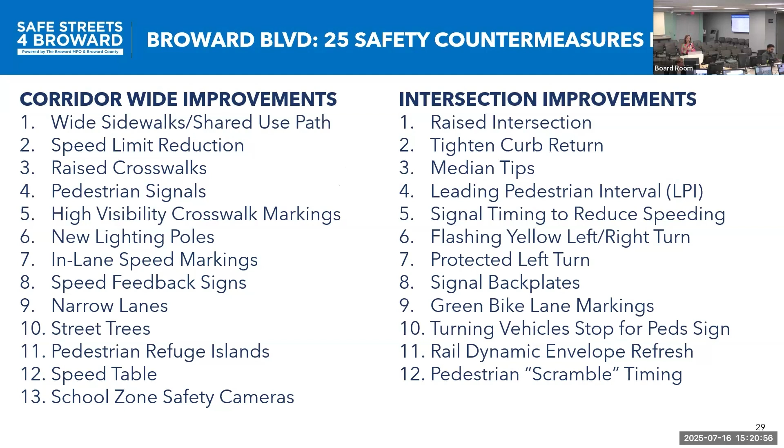As we talked about, a lot of these we're trying to use the safe system approach, so redundancy is key. At intersections we have a lot of overlap, right? So flashing left turns, raised intersections, kind of putting all those things on top of each other in hopes of getting to zero fatalities.

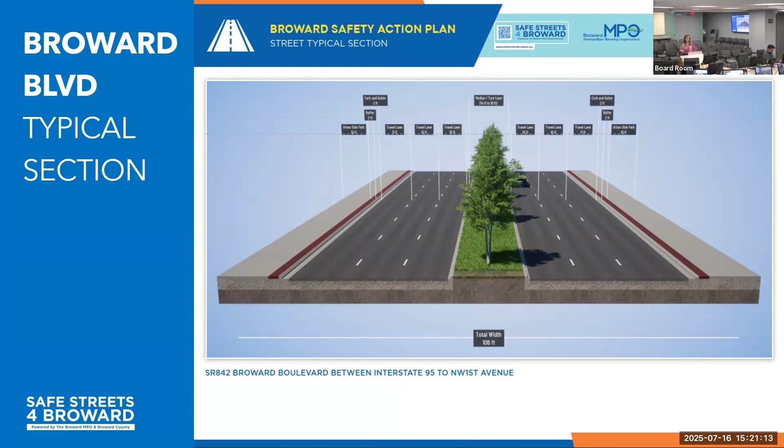This is our typical section that we proposed. No lane reduction because we have like 70,000 cars on our boulevard in the morning. It's crazy. But we widen the sidewalks, kind of reassess the bike lane space into wider sidewalk space to create safer streets.

And then the corridor, which is kind of small, I'm sorry, but for each of them we did a concept that's engineered over an aerial with the right-of-way lines. You can see all the improvements along the corridor where we aligned bus stops with crosswalks.

This is a good one where we had existing bus stops, but we added some mid-block crossings that are signalized, a lot of raised elements to get people to go the target speed of 30, 35 miles an hour. Obviously you're in downtown - this is a reminder this corridor is on the state's list of top deadliest bike and ped corridors, unfortunately. So really getting those speeds down as you enter downtown is key.

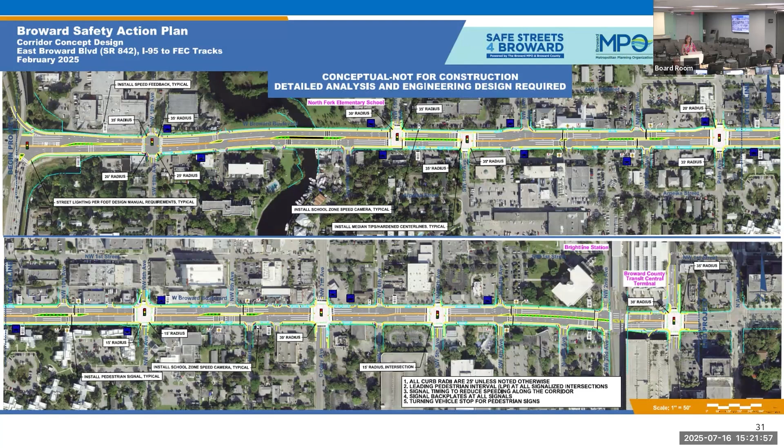Stirling Road is another FDOT corridor. Our corridor was 95 to US 1. On this one, we had 27 safety countermeasures proposed, 16 corridor, 11 intersection improvements.

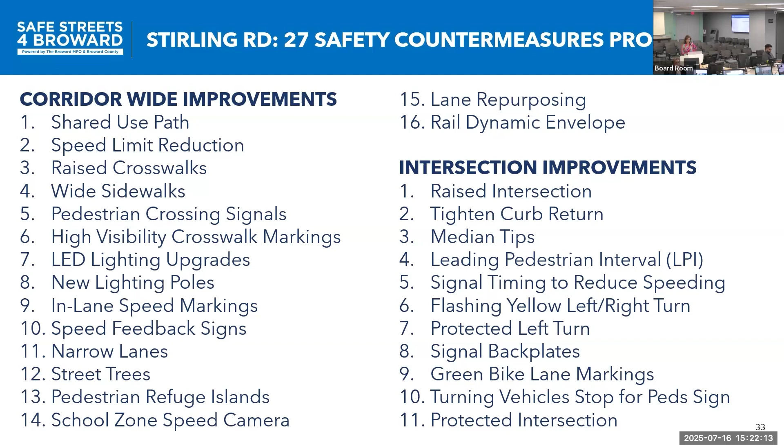I'm just going to quickly go through these. This one had 2 segments. From I-95 through the Dania Point development to Bryan Road, you can see the top intersection. We kept the lanes because we've got those big developments on both sides, north and south. Then as you go east, we were able to repurpose the lane going east to US 1.

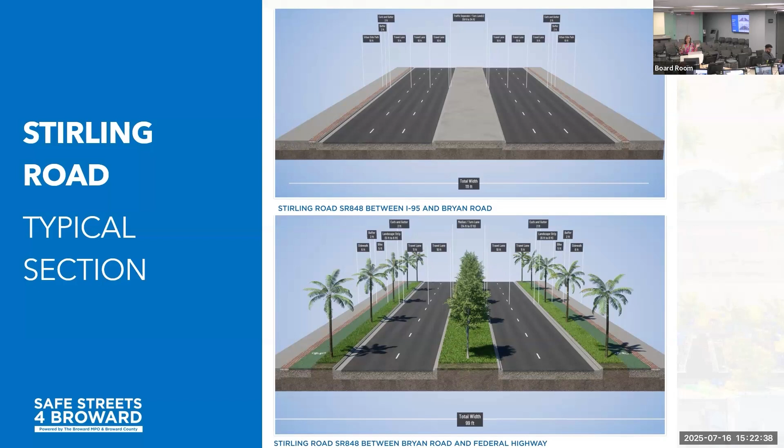You've got a residential area and be able to get those protected bike lanes, wide sidewalks with the tree lining. So that's the intent of Stirling.

Here's the layout. You can see the interstate on the top left, then Dania Point, and that Oakwood Plaza is on the north and south as you get to Bryan Road, which is that first intersection that's coral color. It's a raised intersection to kind of enter into the more residential local context.

And then through there, you've got the 4 lanes, medians, offset sidewalks, tree-lined streets, raised intersections, raised crosswalks to connect transit. We've got kind of a wonky intersection at the railroad that we were able to tighten up.

People are having issues stacking up on the train tracks and not being able to see the signals, so really tightening up that intersection there. And then, yeah, just really tightening everything up and being able to create a safer street.

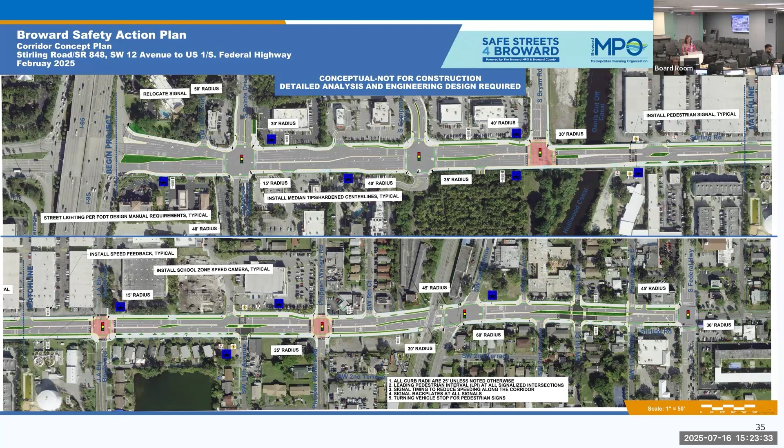The third FDOT corridor is US 441 from Davie Boulevard north to Sunrise Boulevard. This is Fort Lauderdale on the east, Plantation on the west, and Lauderhill on the north. So we've got 3 cities. On this one, we've got 22 total safety countermeasures proposed, including 12 corridor wide and another 10 intersection.

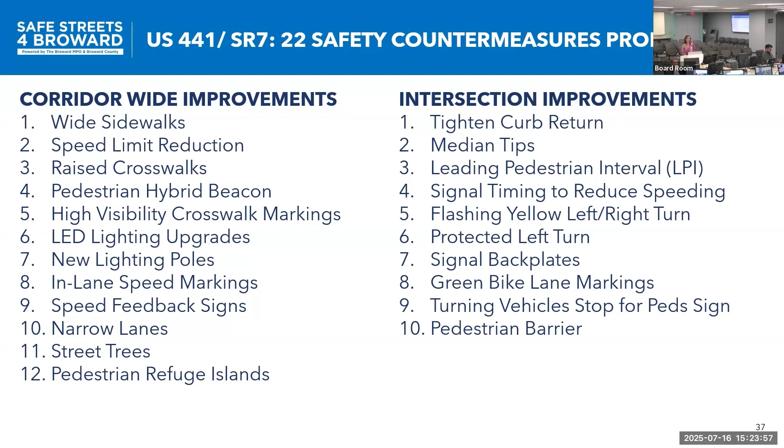Within this one, we have two cross sections, very similar. We're keeping all six lanes. This corridor has a plan to have PREMO transit on it, so we were aware of that. Hopefully there will be a bus priority lane at some point.

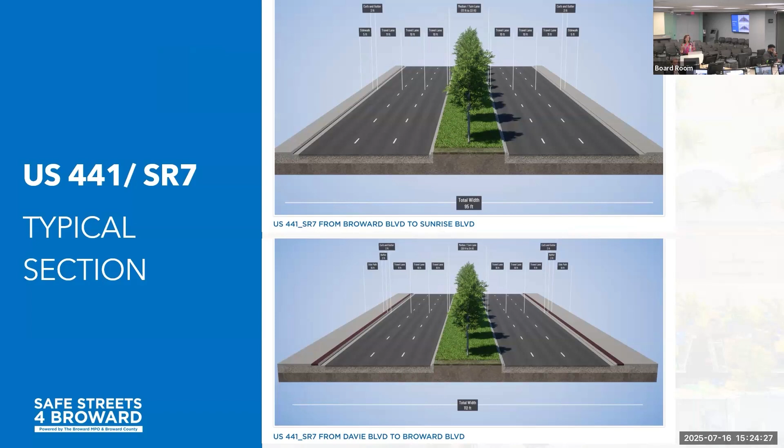But widen the sidewalks. The one on the bottom is to take the existing bike lanes and make them into wider sidewalks, so we're able to reprogram that space and then obviously keep the medians and narrow the lanes.

This one's a little longer, so I've got two pages, but the top left is Davie Boulevard, and then you move north to the right. Really trying to add medians where we could to improve safety, add mid-block crossings, raise those crossings, align them with bus transit to try to get the speeds tempered by narrowing everything up and widening those sidewalks. Unfortunately, not enough space to put in a landscape buffer between our sidewalks and cars, but just trying to squeeze everything down and get the speeds way down was the main goal here.

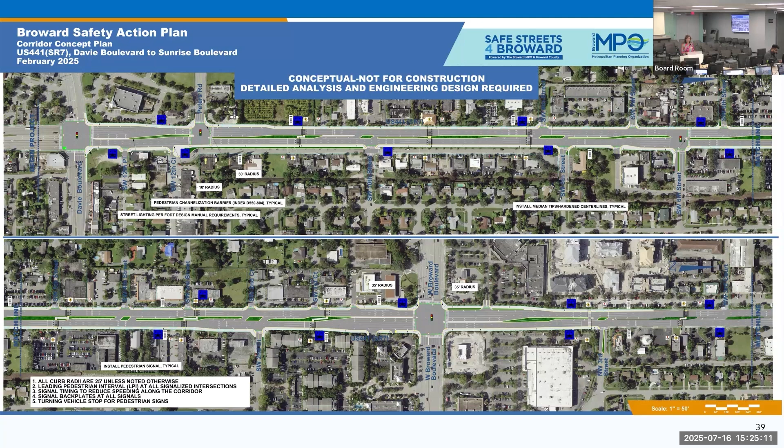And it goes all the way up to Sunrise Boulevard. You'll see on the right side of this screen, there's a trail that runs along the south side of Sunrise Boulevard, and so we've included the trail crossing as a proposal there to get people across safely.

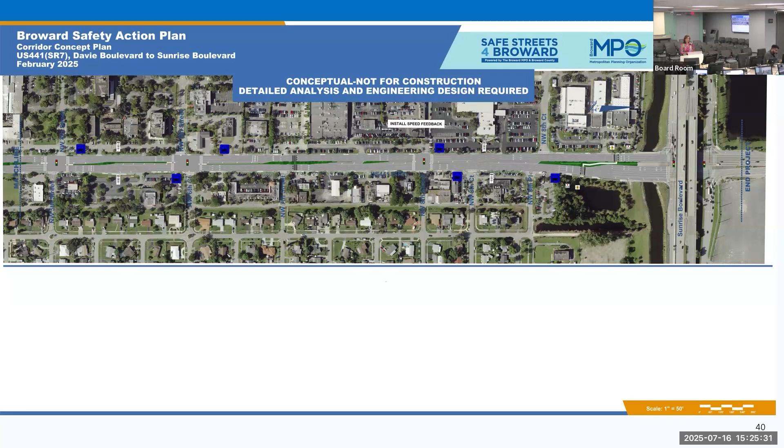So then we move into our county corridors. 31st Avenue is our longest corridor, about 5.2 miles from Northwest 8th Place, just south of Sunrise Boulevard, to McNabb Road. This touches five cities: Fort Lauderdale, Lauderdale Lakes, Tamarac, Lauderhill, and Oakland Park. So five cities.

This one got packaged up by Broward County to propose for a Safe Streets for All implementation grant. Very excited about this one moving forward. This is unfortunately the riskiest street to travel on in Broward County currently, but hopefully not for long. We have 26 safety countermeasures proposed, 15 corridor wide, and then another 11 at intersections, trying to get that redundancy at all those locations.

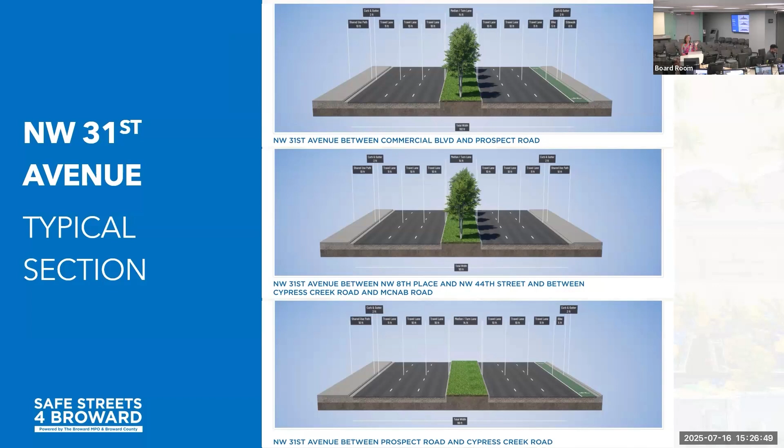Our typical sections, we had several because the right-of-way changed and then the opportunities changed, but basically trying to get really wide sidewalks, especially a consistent wide shared use path on the west side of the street as you move north. In some areas, as you can see, we have dedicated bike lanes, so we kept those where they were.

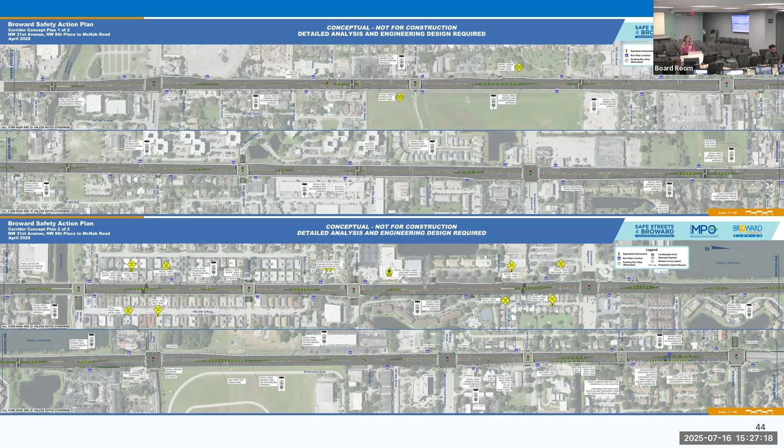And then this one's really long, so I apologize, it's super small because it's 5 miles, and I didn't want to bore you with 20 sheets. Overall, you can see we've laid out all the lanes, mid-block crossings, raised intersections, narrowed the lanes, added trees, and all the technology. We have a school zone on this one, so proposing adding all the school zone amenities, proposing cameras, the new safety cameras as well.

19th Street is next. 19th Street is also a county corridor. I think my limits are completely wrong, I'm sorry. So the limits on this one are 43rd Terrace all the way to 31st Avenue.

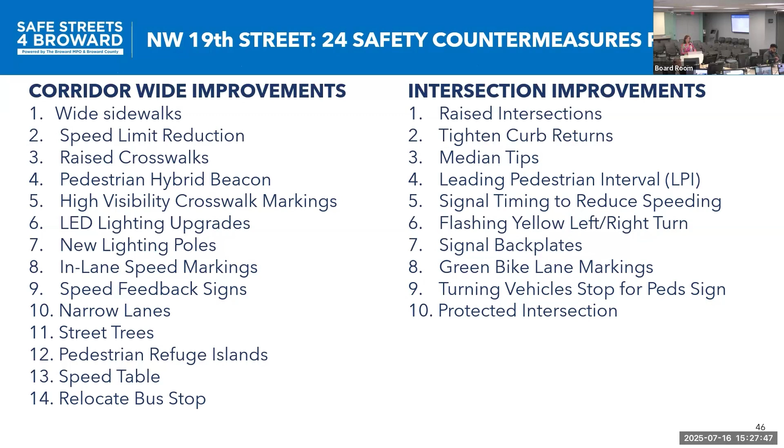The corridor-wide improvements, there's 14, and then another 10 intersection improvements, for a total of 24. So trying to get improved speeds is basically a big one here. We do have some trucks with some industrial here, so making sure that we're accommodating those turns.

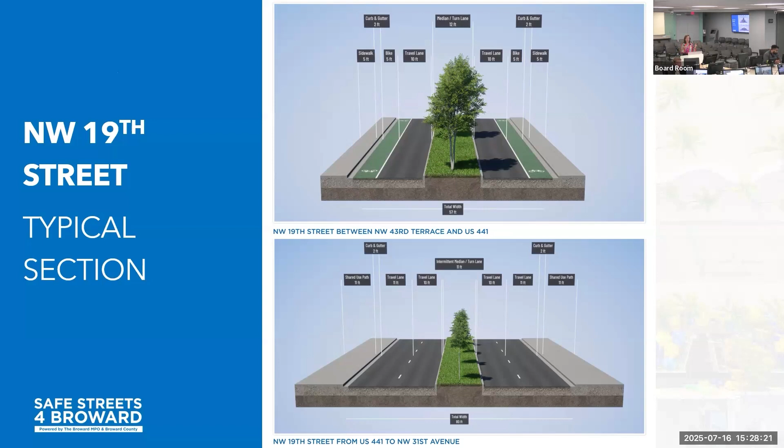But on the 43rd to 441 section, there's actually an MPO county project that's being constructed right now, so that'll be the cross section you see on the top. And then from 441 east to 31st Avenue, basically we're going to take the shoulders, narrow bike lanes there now, so kind of take that space back and do really wide sidewalks on either side and then narrow everything up.

Add trees. So here you can see on the top, the center is your 441 intersection, so we'll take it from there to the east to 31st Avenue, add medians, add trees, raised intersections, raised crosswalks. We've got some speed tables as well. You can see the industrial along the north, so making sure that trucks can make that turning movement. We made sure we didn't block off anything with those medians, but trying to balance everything.

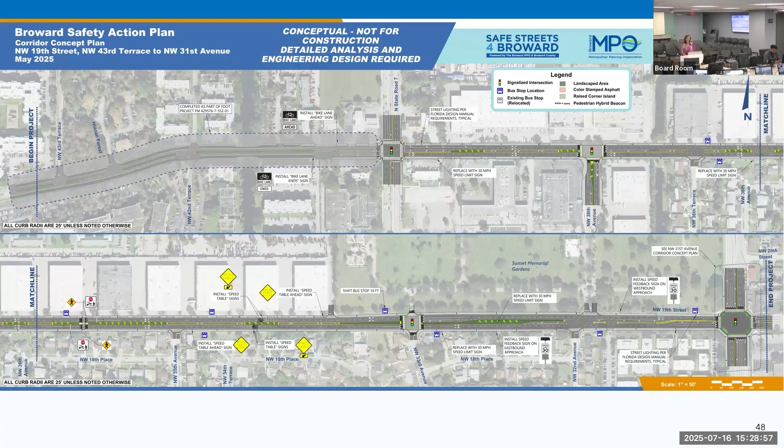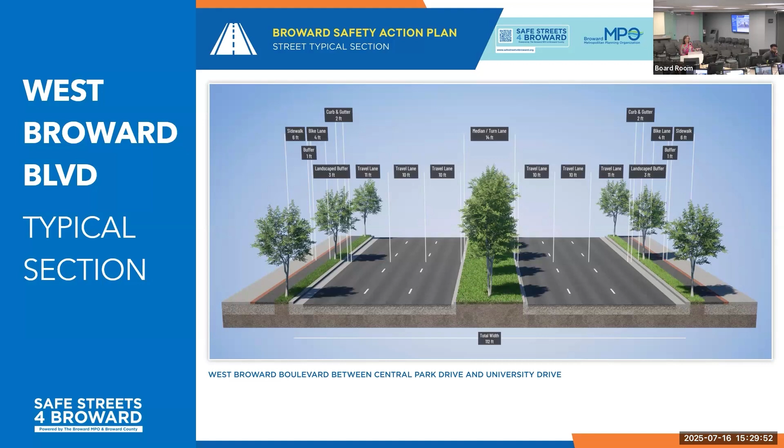This corridor is where the city and county offices are, if you guys have been to Broward County. The cross section keeps the lanes but basically narrows them up. So you've got 10-foot inside, 11-foot outside for transit. By squeezing everything together, we can create that separated space for bikes and peds. So we've got a really narrow landscape buffer, I think it says 3 feet. And then you can see the bike lane and sidewalk are there, trying to fit as many trees as possible to get that enclosure feel.

This project, top left is Central Park Drive. You can see Central Park is on the north side there. Then as you go east, Pine Island, and then the mall, Broward Mall, is on the south as you go east on the bottom to University Drive. Again, medians, trees, aligning bus stops with raised crosswalks, a couple of raised intersections to really get those speeds down, speed radar signs, and then of course all the technology at the intersections.

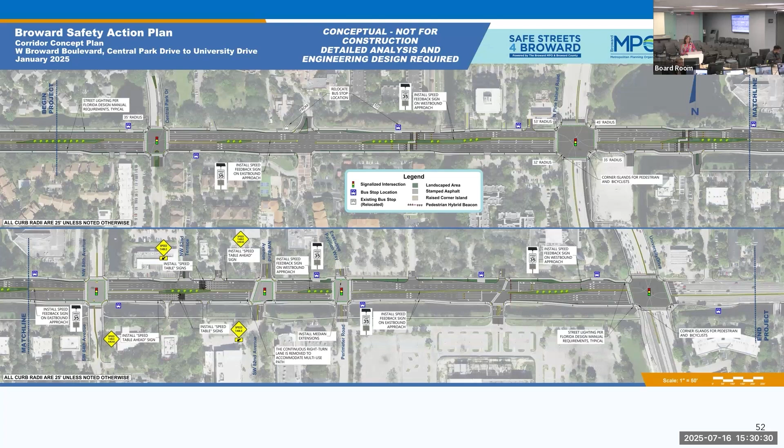So starting with city corridors, Royal Palm Boulevard is in the city of Margate. This project is Riverside to 441. We have 22 safety countermeasures proposed on this corridor, 13 corridor, another 9 intersection.

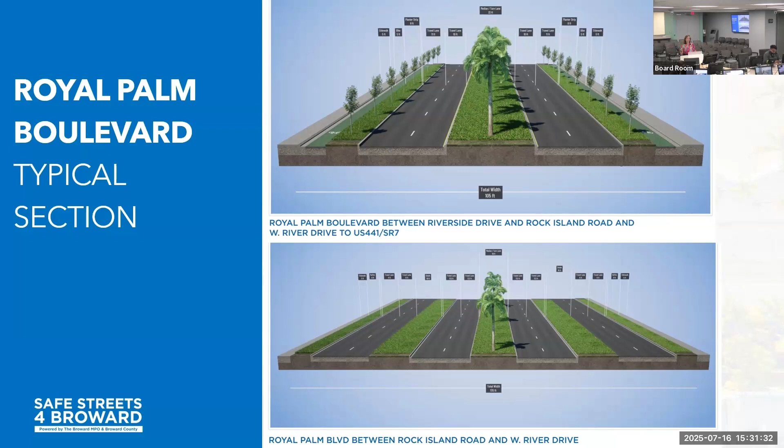This one is 4 lanes existing, but really, really wide lanes and a very wide median. So we're able to reallocate the space from the median to create 2 landscape buffers on the sides, is how we did it. So no new right of way, just taking that space and reallocating it. You can see we got protected bike lanes and sidewalks on both sides on the corridor from Riverside to Rock Island. Then when you get to Rock Island going east, there's these frontage roads that exist. So our thought was we'll use the frontage roads that are very low volume as our parallel bike facilities and keep the bikes and peds separated, then just narrow up the street to do some traffic calming.

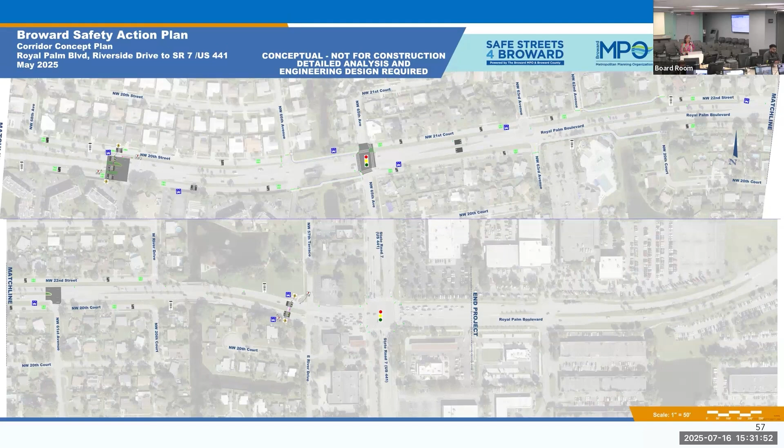And these are the concepts. So you can see a lot of green is kind of shifting to either side. Right now there's a really wide median. And then here we just did spot improvements, so we just showed the aerial with the spot improvements. You can see some intersections and some raised crosswalks, some median tips.

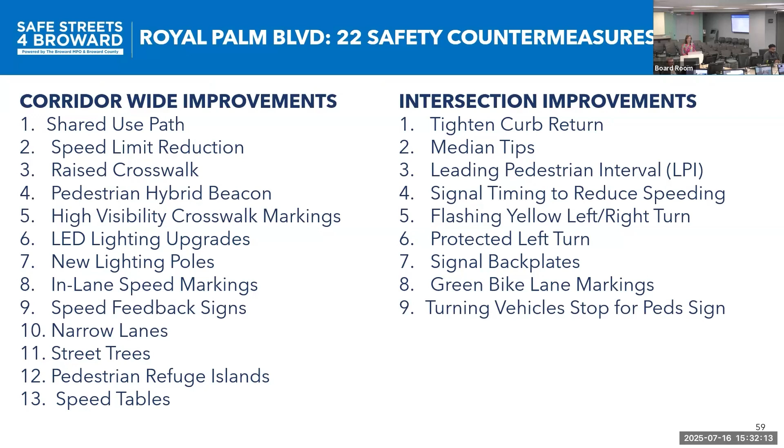Rock Island is another corridor in the city of Margate. Our limits are Southgate Boulevard to Royal Palm. This one has 22 safety countermeasures, similar to Royal Palm. It's a similar suburban context, so 13 corridor, 9 intersection.

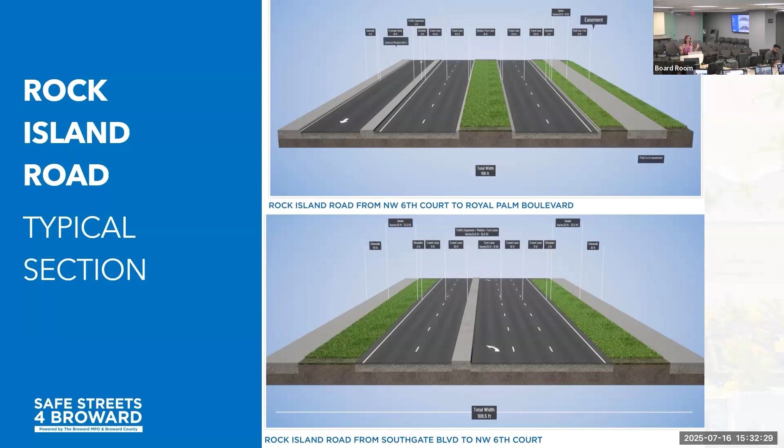This one also has that frontage road, as you can see on the top, so you've got kind of this frontage road feel, putting the bikes there. Then as you move south, the frontage road drops, and so really creating those wide separated spaces for the pedestrians and then narrowing up all the lanes. Speed is really a big deal on Rock Island and Royal Palm. You would think because it's in the suburbs that there would be less people crashing, but there's a lot of crashes here, and the speeding is evident when you're out there.

This one starts at Southgate Boulevard, which is kind of not a square intersection, as you can tell. So making sure the turning movements work for the vehicle types, we tightened up that northbound right turn was kind of a high-speed right, so we put some curvature in it to try to slow that down. Then you can see just north of Southgate Boulevard, there's a canal crossing, so we proposed adding a trail crossing there with a raised crosswalk and a signal.

And then as you move north from there, it's really narrowing up the lanes and then creating really wide shared use paths on both sides. As you move north, north of 6th Court on the bottom there's this really big swath of green, and we understand that's an FPL easement, and the city has an agreement. So we're able to widen our trail onto that easement, which was really useful.

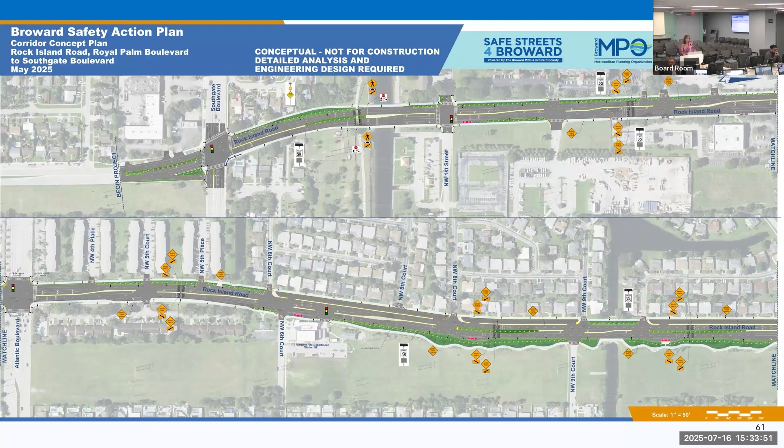And then this goes all the way up to Royal Palm Boulevard. So it intersects actually with the other project that we did.

The next corridor is Sistrunk Boulevard in the city of Fort Lauderdale and partially in Broward County, from 27th Avenue to Andrews Avenue. Sistrunk Boulevard, unfortunately, is the riskiest city street in Broward County.

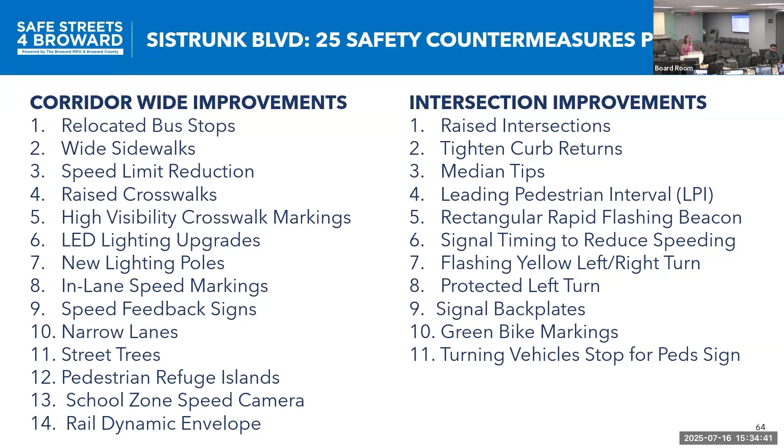So a lot to do here. We proposed 25 safety countermeasures, 14 corridor, 11 intersection. The city and the county have done a lot of work on Sistrunk over the years, so some of these improvements you'll see listed are already there. Wide sidewalks is one of them. They're already there, but I wanted to make sure we were giving you a holistic list. I'm not trying to take credit, so good job to the city and the county already for doing a lot here. But it's still really risky, so what else can we do?

This one's really narrow already. On the west end, which is the county jurisdiction from 27th to about 22nd, it's 4 lanes right now. We kept it 4 lanes, but tried to squeak the lanes a little tighter so we could widen the sidewalks and try to separate those sidewalks. Then in the city section, 22nd over to Andrews, you've got 3 lanes for most of it. So really trying to squeeze it again, but it's really tight already. We noticed when we went out there, there's 9 and 10-foot lanes already.

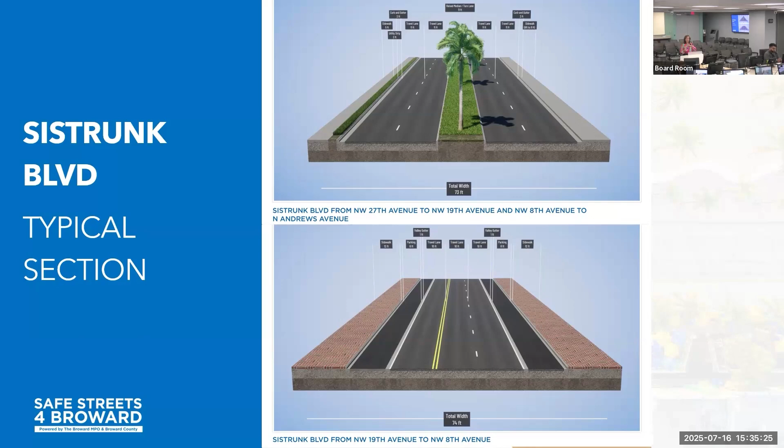So really the improvements that are key on this one are going to be lighting. It's a huge issue out there, really dark at night. They have decorative lighting, and some of the lights have already been retrofitted to have a brighter fixture, but most of them haven't been. So I think that's hopefully an easy intermediate fix for us.

Also adding some more traffic calming, because hopefully if there is a crash in the future, if speeds are lower, hopefully it won't be fatal, right? So adding raised crosswalks. The city is already proposing 5 new crosswalks on this corridor. I think those are going in maybe as soon as this year. So I'd really love to get this finished, so maybe you can raise them, Karen, wink wink. So we can get some traffic calming and then maybe raise some intersections.

One thing - we had both of our public meetings at the YMCA, which is right in the middle of the corridor. That's really a community center, and you've got a lot of people walking to that center, but there's really no intersection control at that intersection where people are coming from the south to get to the YMCA on the north. So we proposed a kind of tabletop speed table for the length of the face of the YMCA, so it's like a shared street in front of the YMCA, for traffic calming and pedestrian safety there.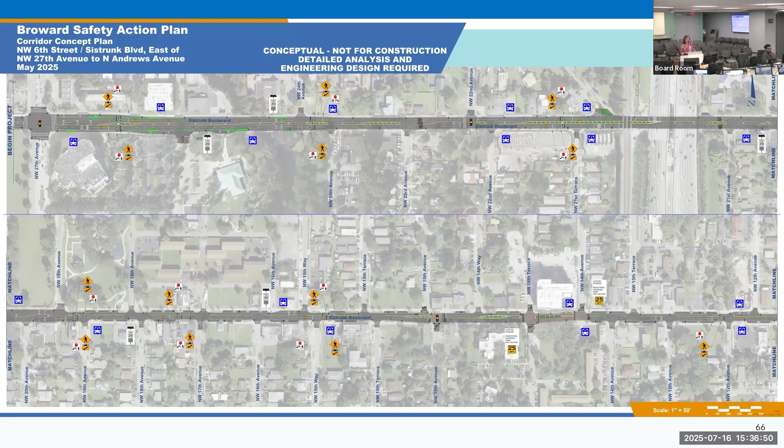So a lot of improvements proposed on this one, but we were scratching our heads because it's already narrow, right? It only has a few lanes right now. So really, how do we add more safety and get creative on this one? Lighting will be key, and safe speeds will be key on this one.

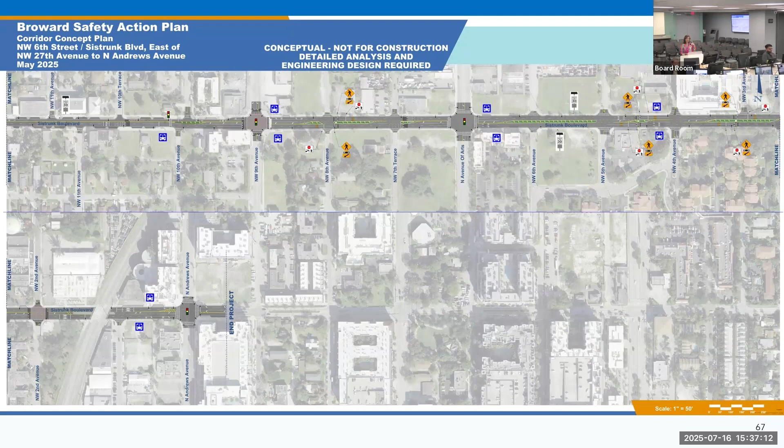Southwest 10th Street is a corridor in Deerfield Beach. This one is a city corridor east of I-95 over to Dixie Highway. We proposed 22 safety countermeasures, 15 corridor, 7 intersection, and on this one we actually proposed roundabouts.

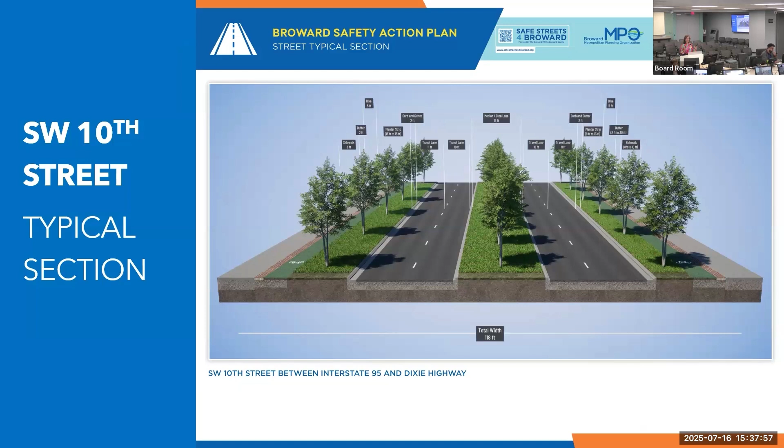So I'm really excited that we got to do something a little bit different on this one. This one also is 6 lanes east of the interstate, but the volumes showed that they would warrant a repurposing to 4. So we gave them an opportunity to reallocate that space to create protected bike and pedestrian opportunities with tree-lined corridors on both sides. And then this is the beautiful roundabouts.

So west of here, I'm sure all of you know, we have the Southwest 10th Interchange Expressway project, and that'll tie in right at where it says begin project. The good news is that the engineer who designed this project is also leading that project, so hopefully we'll get some - what do we say?

Some synchronization between the two, because he's being thoughtful of what to design there.

The intent is they're going to do a 4-lane local street on Southwest 10th west of here, and the expressway functions will be separate, so those 4 lanes will tie right into these 4 lanes. That gives the city an opportunity to redesign it. We did preliminary lane repurposing analysis and preliminary roundabout analysis to justify these, and we got creative with the geometry to fit it within the right of way. Really excited about this one. This was also packaged as part of an SS4A implementation grant to USDOT, so fingers crossed we get both.

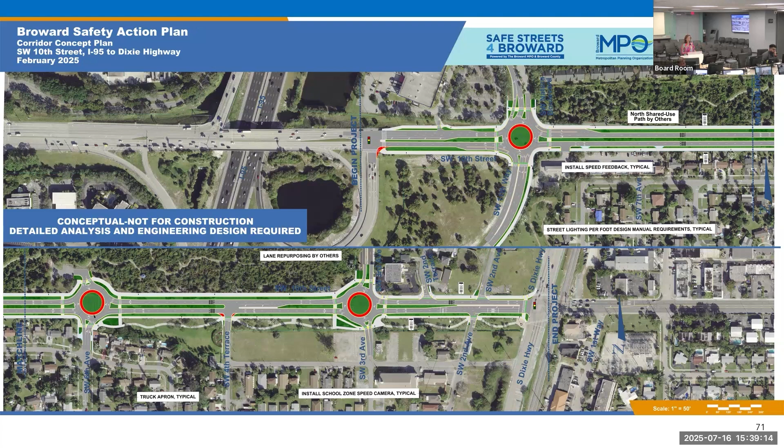Taft Street is next, in the city of Hollywood. The project limits are 70th Terrace to US 441. This one has 23 safety countermeasures proposed, 12 corridor and 11 intersection.

We had entertained lane repurposing and then met with the politicians, who were on the fence to move forward on that. We had some for and some against, so we kept the 4 lanes to proceed in the corridor report.

So it's really about slowing speeds and adding medians, which was a big push from the city because access management was kind of a mess here with the commercial on the north. And then aligning our crosswalks with our bus infrastructure and raising those crosswalks, trying to create space for pedestrians to cross safely. This area has a lot of working class families, with commercial on the north and schools on the south, so a lot of people want to be able to just walk across the street instead of driving. That was the need we heard at the public meetings.

Here's our typical section. At the top is the proposed 4-lane, and then I snuck in the 2-lane scenario.

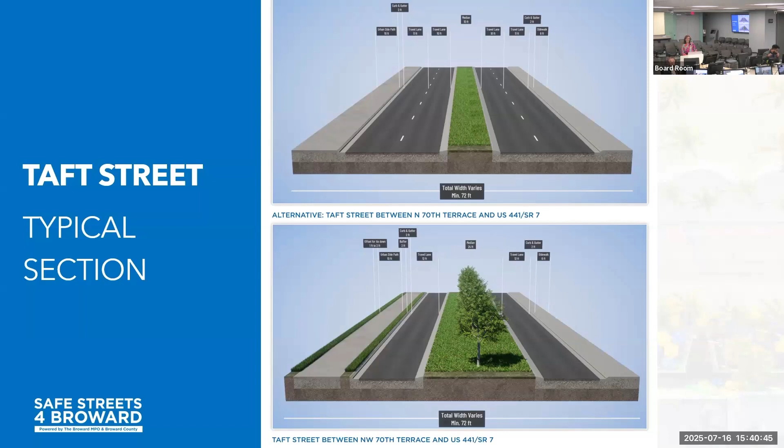Sorry, Rick. Yeah, he was very supportive, so thank you to the commissioner.

All right, so I got through 11 corridors in a few minutes. Next steps: we're updating these corridor reports right now, and I'm hoping to submit those final next month. Then Fazil and James are going to take this to the MTP to integrate those for programming in November, so they'll be reaching out to all the cities to get your resolution of support. They'll be calling you.

Something else regarding these concepts: these are not the final concepts. Those are from our second round of reviews. The consultant team is starting to work on finalizing them. We will be bringing these concepts to the September meeting as kind of an open house, so you all can actually see it rather than trying to squint your eyes to find it on the screen. We're also going to have all this information posted on our website.

For some of the corridors we decided to move forward with, even through our MTP process, there are some roadways that still bubble up to the top regardless of how you do your prioritization. Sistrunk was one of them - it has consistently been a road of concern with a lot of severe crashes. I think 31st Avenue, under different prioritization situations, has also been very high up there in terms of severe crashes. So it's kind of interesting how through this process we saw similarities with some of the analysis done in the past.